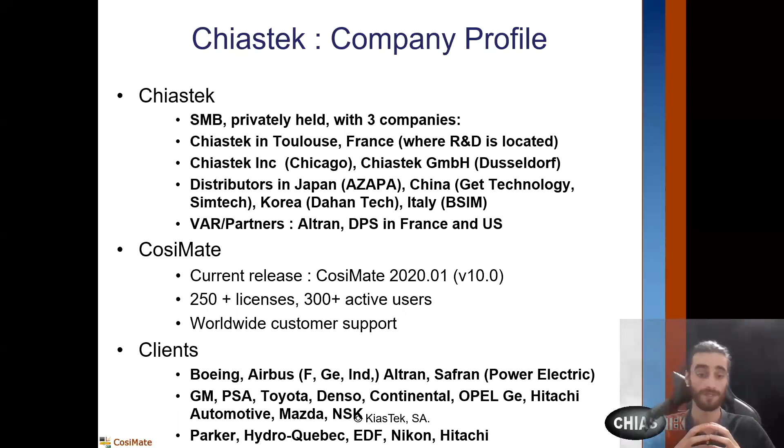Cosimate has more than 250 active licenses, more than 300 active users, and worldwide customer support. Clients are various: in aeronautics, Boeing, Airbus, Altran, Safran, and in automotive, PSA, Toyota, GM, Denso, Continental, Hitachi, and others. And in other domains where co-simulation can help to create complex systems, we can cite Hitachi in other domains of automotive, EDF, or Parker.

So we have written some papers, and currently I'm writing a paper on implementing multi-FMU in a co-simulation platform to validate these FMUs. So I invite you to contact us, and we'll give you all materials.

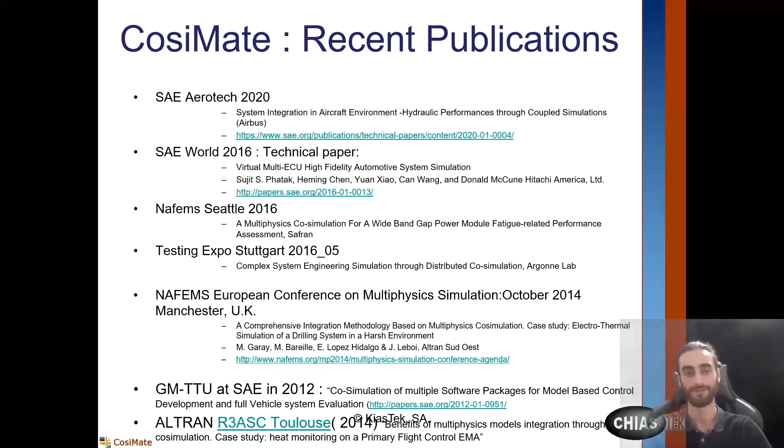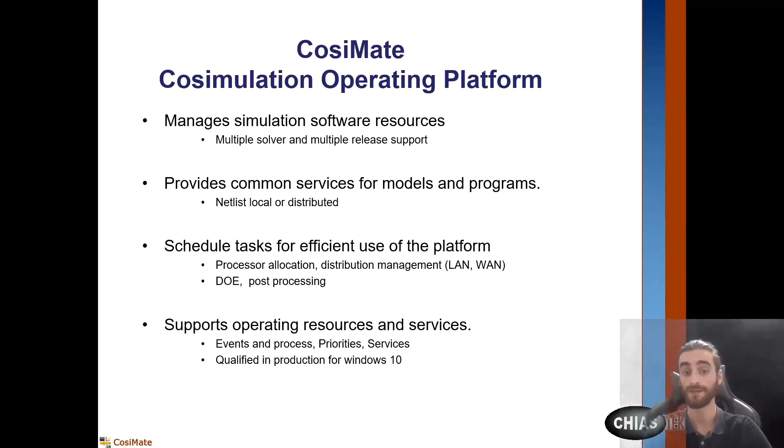So Cosimate is the operating platform to co-simulate a system. It manages simulation software resources, provides common services for models and programs, schedules tasks for efficient use, and supports operating resources and services. So it is a platform for multi-physics and co-simulation. It is a co-simulation environment.

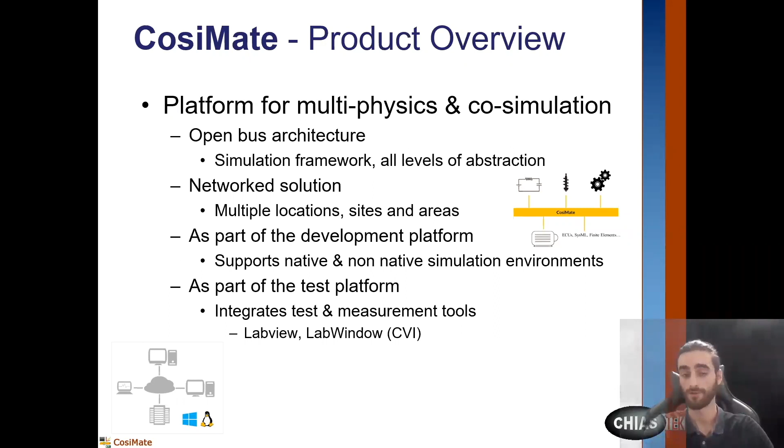So it's composed of an open bus architecture, with a network solution. Cosimate can be used as part of a development platform, as part of a test platform, and as part of a verification platform, which supports co-simulation between different abstraction levels. We don't have regression of the model, but we work with native simulators.

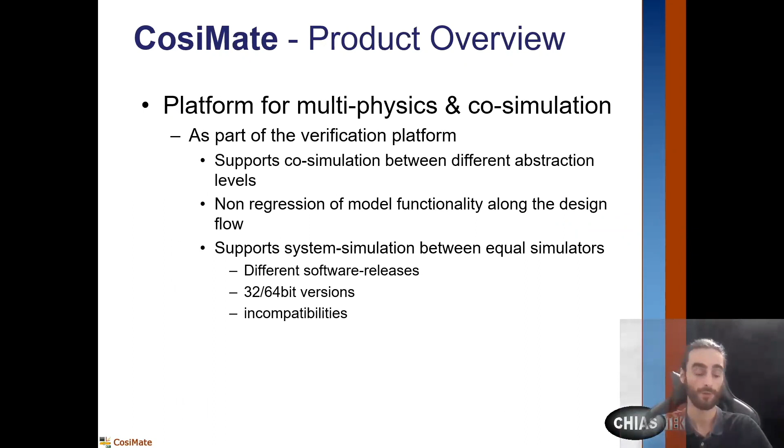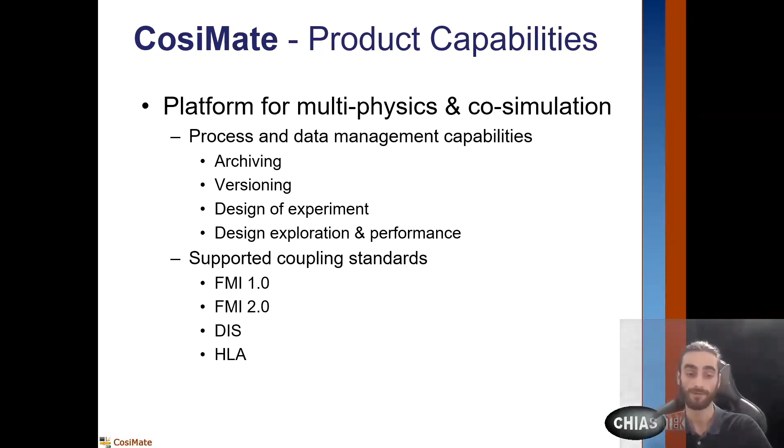So the process and data management capability of Cosimate helps engineers configure a system with archiving, versioning, design of experiments, exploration, and performance. Cosimate supports coupling standards such as FMI1, FMI2, DIS, and HLA.

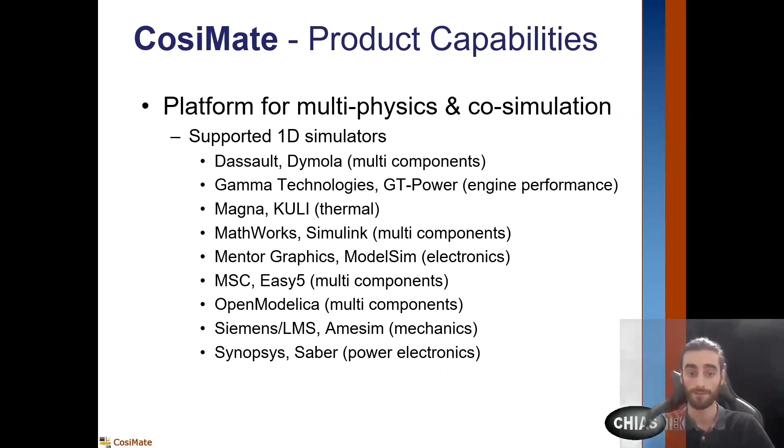So regarding 1D simulators, there is a list of coupled tools. We can cite Dymola from Dassault, GT Power, Simulink, ModelSim, Easy5, OpenModelica, Amesim from Siemens, and Saber from Synopsys.

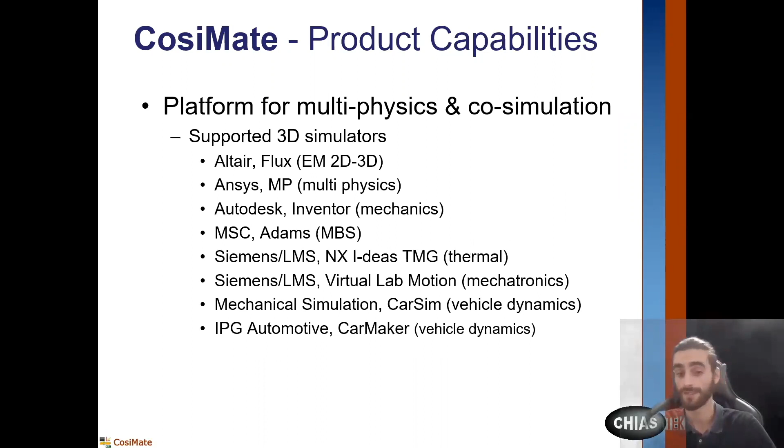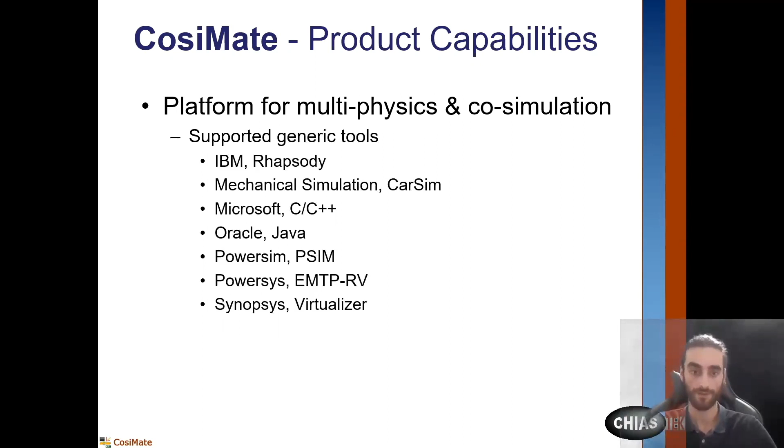Now a list of 3D simulators controlled by Cosimate. So we can cite Flux from Altair, Inventor from Autodesk, Adams from MSC, CarSim from Mechanical Simulation, and CarMaker from IPG. And Cosimate supports other generic tools, as you can see. Okay, so that's finished for the general Cosimate and Chiastek presentation.

Now let's talk about my paper, how to implement multi-FMU with the Cosimate co-simulation platform. So everyone knows FMI, I think. FMI is a standard for co-simulation at system level. In our paper, we will present a strategy to instantiate models between internal and external stakeholders using different modeling tools.

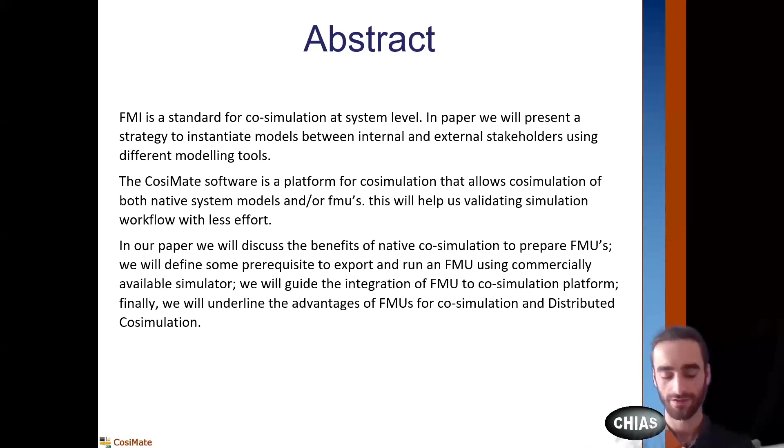The Cosimate software is the co-simulation platform that allows co-simulation with native and FMU models, and this will help us validate the simulation workflow. So in our paper we will discuss the benefits of native co-simulation to prepare FMUs for co-simulation. We will define some prerequisites to export correctly and run properly an FMU using commercially available simulators. And we will guide the integration of the FMU inside the co-simulation platform.

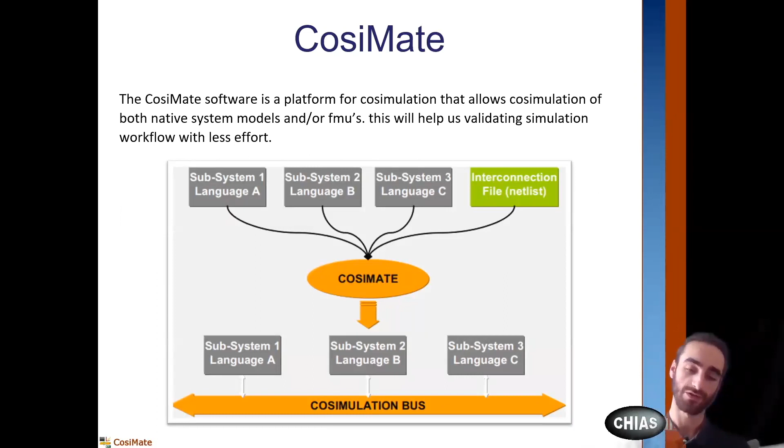So, the Cosimate software is a platform for co-simulation that allows co-simulation of both native and FMU models. So this will help us validate the simulation during the transformation of a model to FMU. The native co-simulation is a known example. So in our paper we present the example.

It is a multi-cylinder engine model which is hosted by GT Suite. We have a controller with a Simulink model which controls this engine, and an AMESim model which is a simple converter inside our co-simulation. So native co-simulation will help us validate the original results, and these results will be compared later to the results of the FMU co-simulation to validate the system with FMUs.

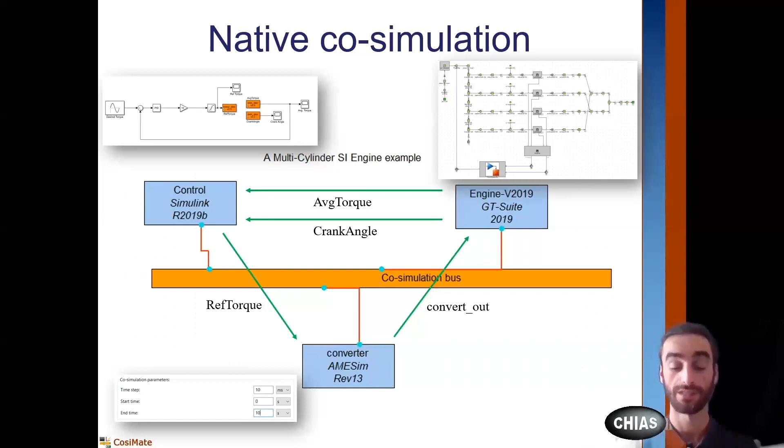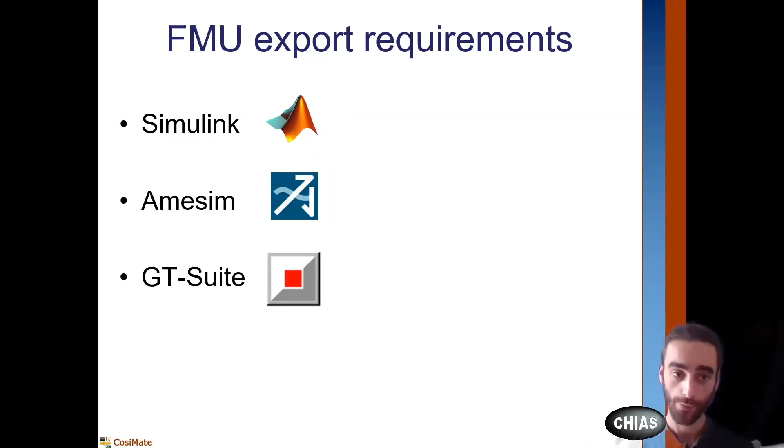So the three tools are Simulink, AMESim and GT-Suite. In our paper we will guide and inform on existing documentation to properly export a model with Simulink, a model with AMESim and a model with GT-Suite. So once FMUs are exported, the co-simulation can be rebuilt using FMUs.

So at the start we have three native models inside our co-simulation, and once an FMI model is exported from one of the three tools, we can import this FMI model inside our co-simulation with Cosimate and with the other native models to validate this FMU inside the co-simulation, comparing new results with original results.

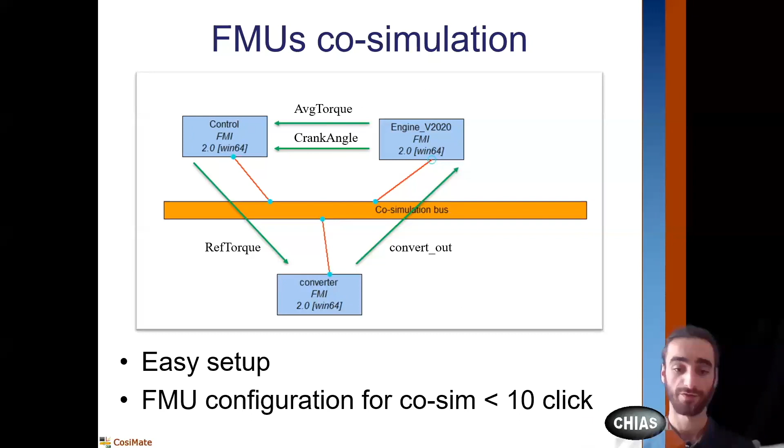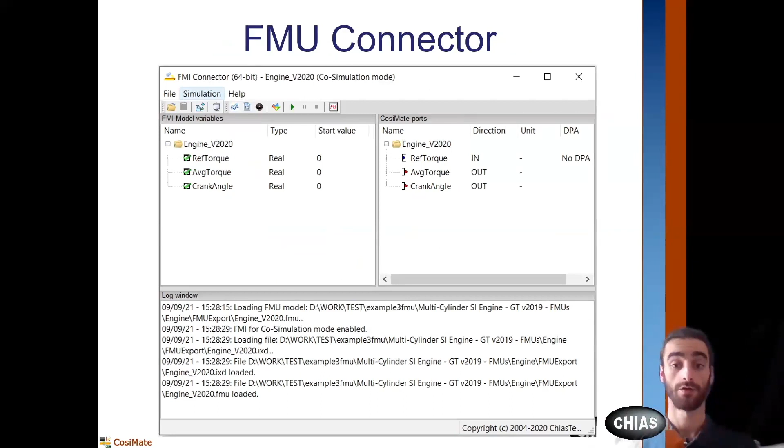So the setup is very easy for FMU co-simulation, and the configuration of an FMU for co-simulation is less than 10 clicks. So this is the FMU connector we will present. It is a tool used to control an FMU once it is exported, and we will configure co-simulation parameters inside the FMI connector. Next chapter is distributed co-simulation.

We can use distributed co-simulation with FMUs as any tool controlled by Cosimate. The distributed co-simulation is a real gain of time, because the principle is we don't have an exclusive host which has all models of our co-simulation and needs to run everything inside the same computer.

Here, with the distributed co-simulation, we have three computers located at different places linked between them with a VPN, for example. And in this case, we can have a co-simulation system running through different countries. For example, a video is available on the Cosimate website with distributed co-simulation.

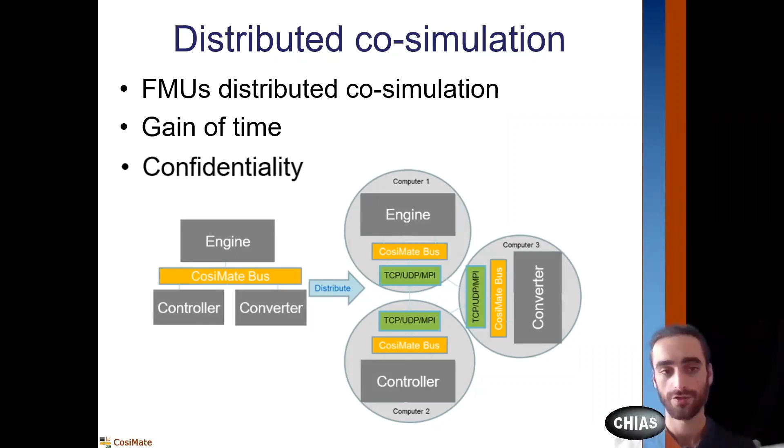And the second advantage of distributed co-simulation is confidentiality, because we don't have to send a model to another actor of the co-simulation, and results of our model are located at the place of the model. So we send just the information we want to send, and we don't have an export of the model.

So logs are very important with FMU, because an FMU doesn't have an interface to access the FMU content. So it is the first role of a co-simulation environment for FMU. So logs are very important here. FMU logs are in the FMU connector, which is the tool used to control an FMU with Cosimate.

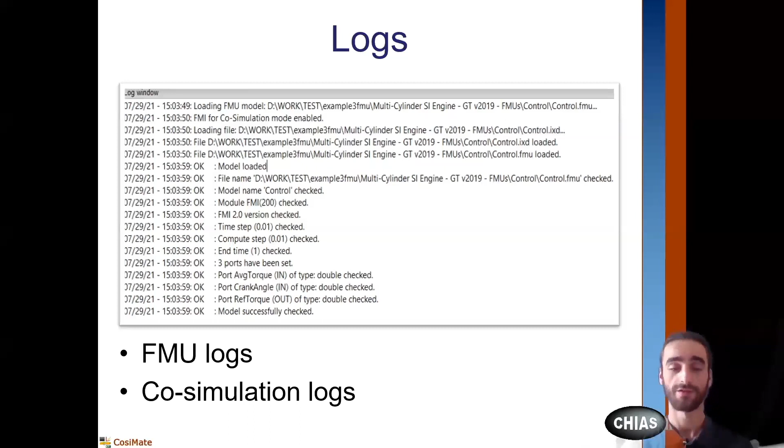Inside the log window, we will have FMU logs, so information about the FMU and run or configuration information, and co-simulation logs. It will help us to configure the co-simulation environment properly. Next chapter is the results.

So the results are the base of our example, because we compare results to validate the case. So Cosimate has a tool named CosiScope, which can be used with the CSV option. So inside the co-simulation, when you run a co-simulation, you have an option named CSV option, and once it's checked, each model of the co-simulation will create a CSV file to store data transited by the model during the co-simulation.

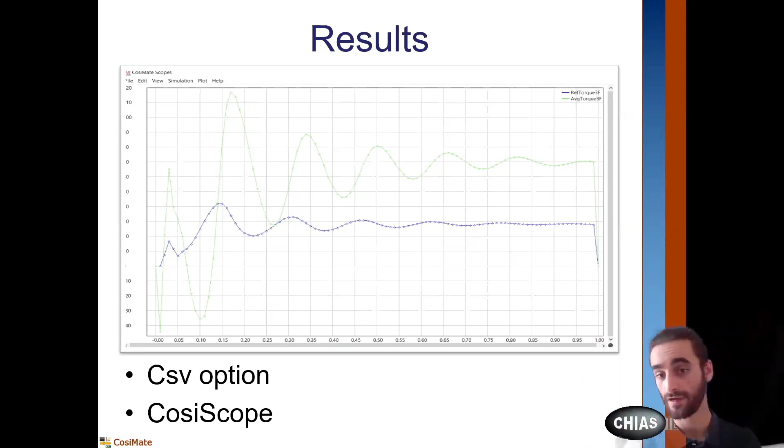Once the CSV file is created after co-simulation, we can use the CosiScope tool to import the CSV file to interpret values. So, to conclude, in our paper, we will discuss FMU validation using Cosimate, how we can use Cosimate to validate FMU, advantages of native co-simulation, advantages of distributed co-simulation, and finally FMU advantages.

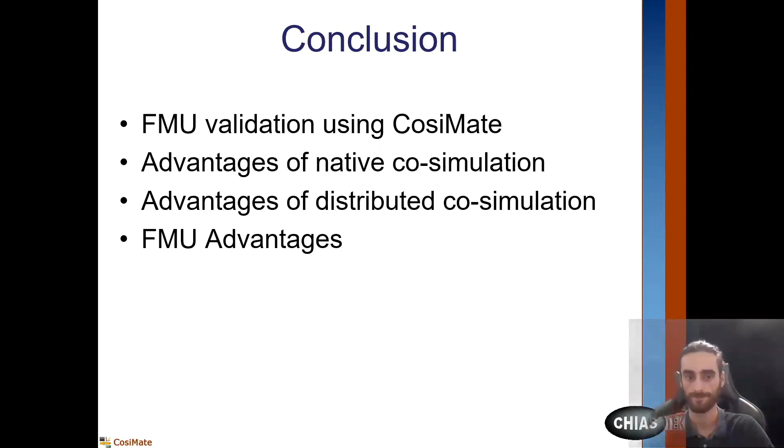In this video I will demo how to export a Simulink model as FMU and use it in co-simulation with PSIM using Cosimate. The example used is PSIM Simulink from the Cosimate installation. Let's run the original co-simulation example using PSIM and Simulink. It is configured, so we just have to click on Run Interactive Co-simulation to run it, and follow the Cosimate instructions.

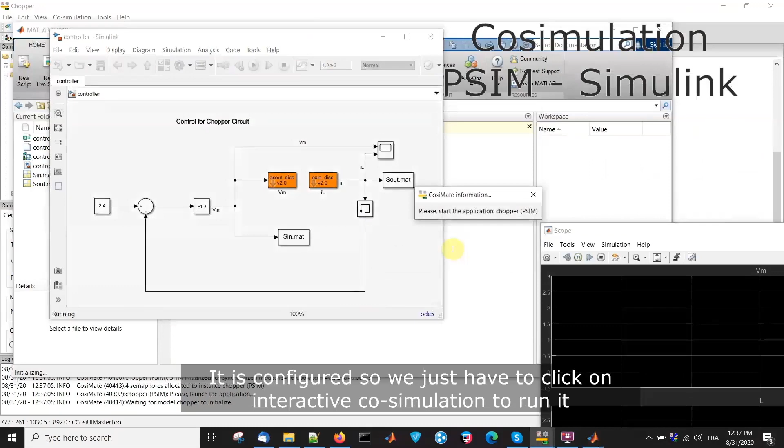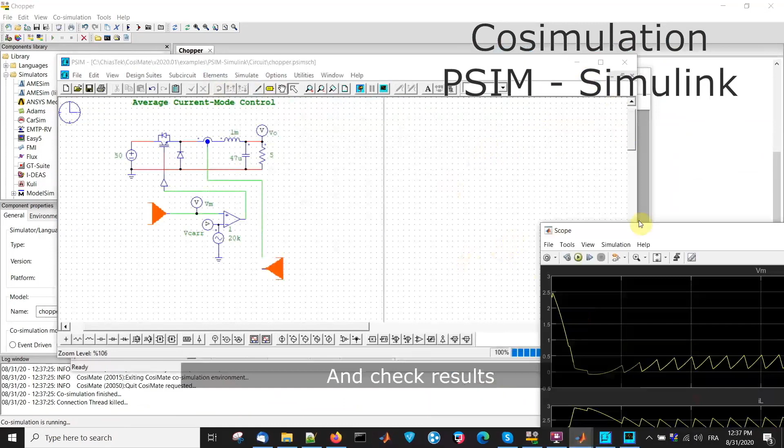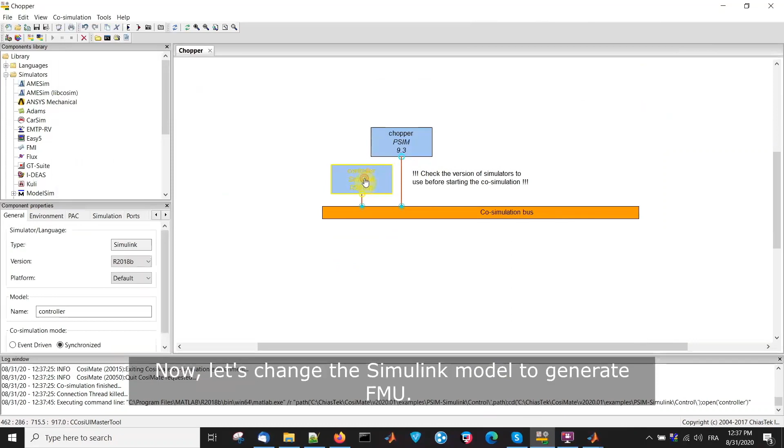We can now click on Run and check the results. Now let's change the Simulink model to generate an FMU. We have to replace ports, Cosimate ports, by simple Simulink inputs and outputs.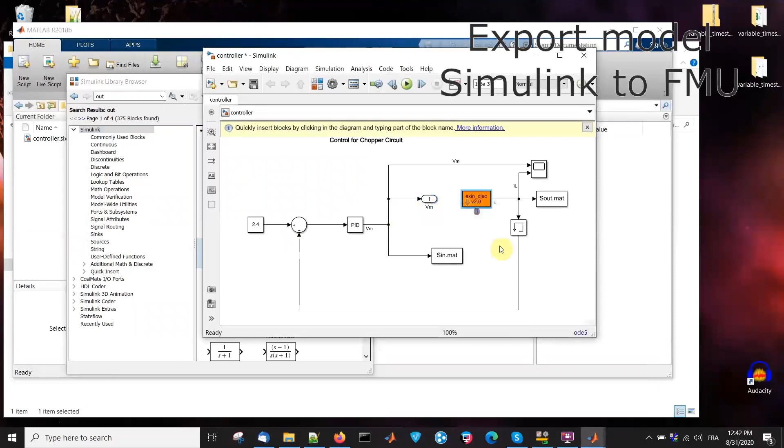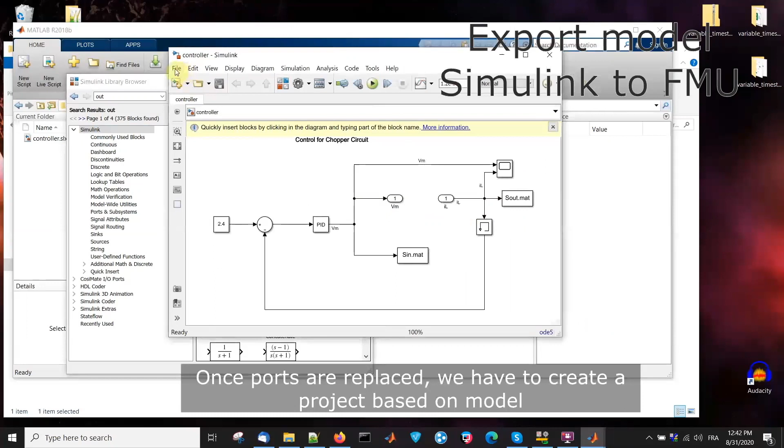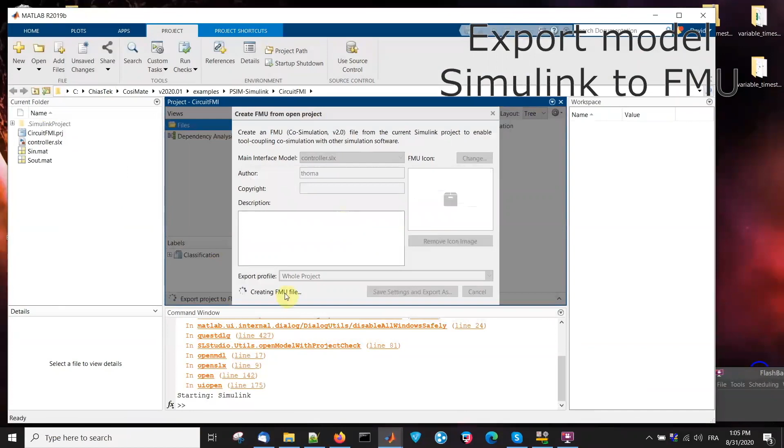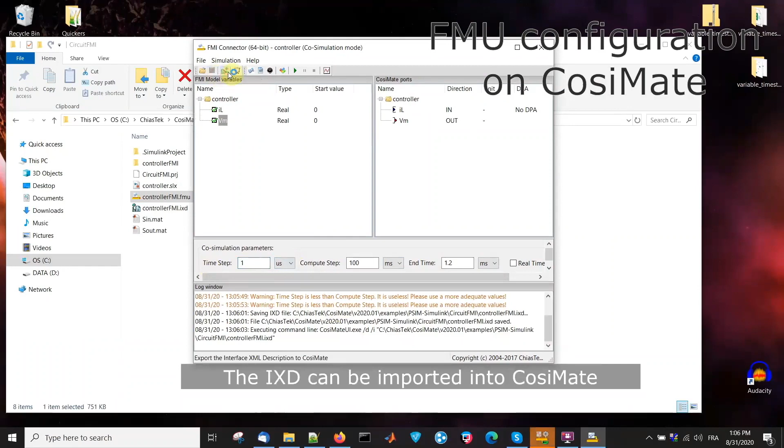Once ports are replaced, we have to create a project based on the model. The IXD can be imported into CosiMate. Verify port links, check the co-simulation, and run it. The CSV option of the CosiMate bus can be useful to analyze results of the FMU model.

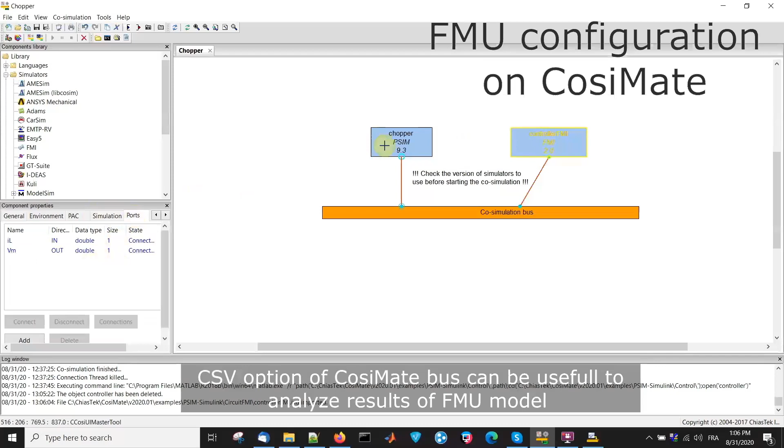When we build a co-simulated system, it's recommended to enable verbose mode using Tools, Options, and Log. This option allows you to see more debug logs on CosiMate and its models. FMUs exported from MATLAB require a MATLAB session to run.

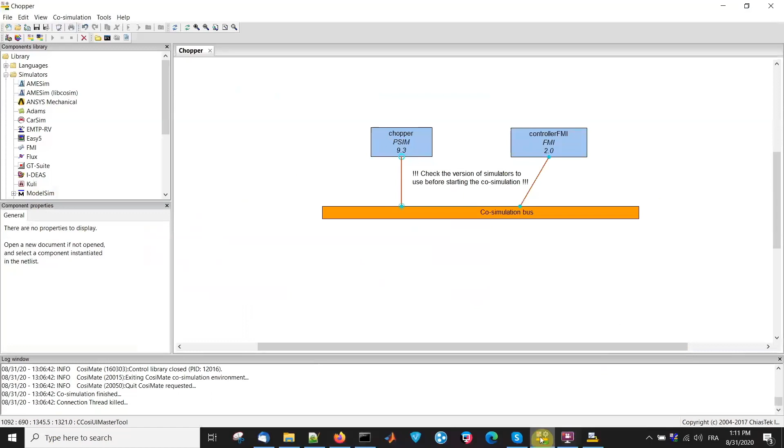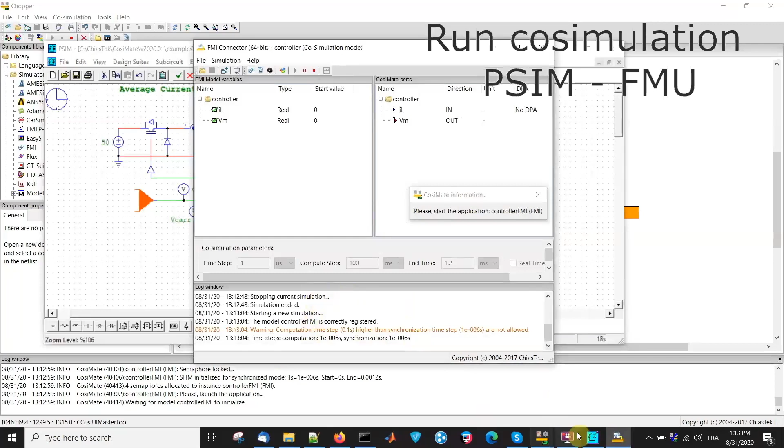Now we can run the co-simulation using PSIM and the FMU model. And check results.